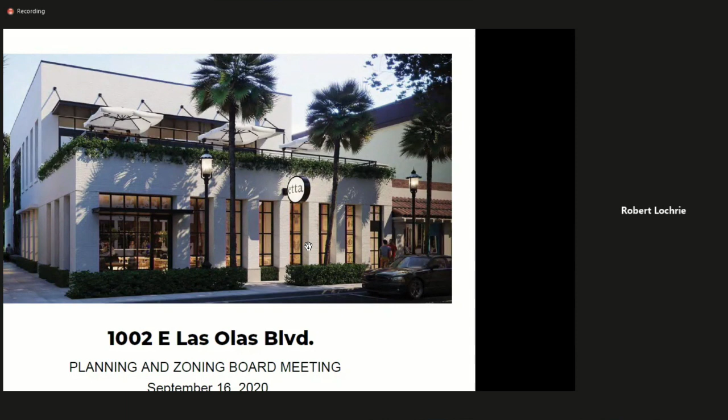One of the things about this site, similar to this entire corridor of Las Olas, is you have ample parking both to the south of the site as well as on the north side of Las Olas.

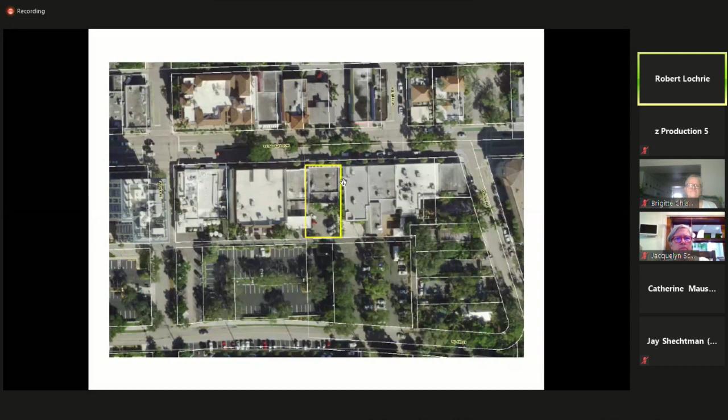This next view is a closer view of the specific parcel. It is known in part by, on the east end of the property, there is a breezeway that connects the city's parking facility - this is the nautical lot - just to the southeast of the site, to Las Olas Boulevard on the north. So this is the parcel we're talking about specifically.

This is the proposal for the new restaurant. It is a 2-story restaurant with ground floor restaurant, all interior to the building with seating. There is a second floor which includes a terrace with outdoor seating above. The second floor is stepped back significantly to provide for that terrace and to keep a uniform cornice height along Las Olas.

On the left side of the graphic, you see the breezeway I described. The windows that look into the restaurant continue not only along the storefront, but also along that breezeway. This breezeway is one of many along Las Olas that provides close access to the street and to the parking facilities behind. Mr. Ladd thought that was a very important component to keep with the restaurant.

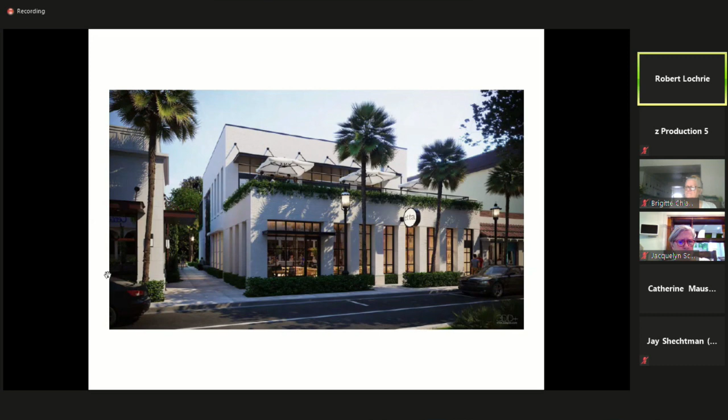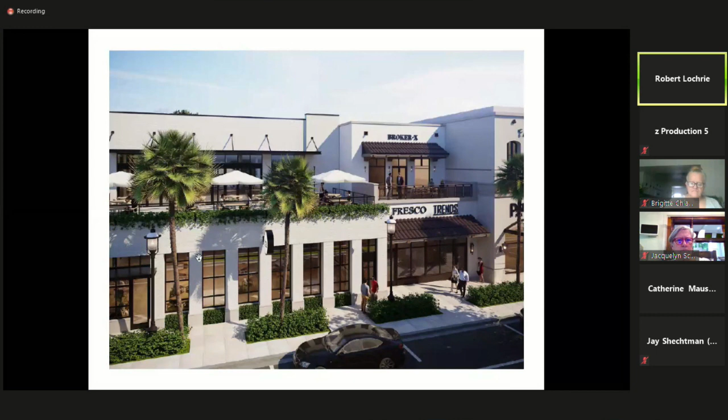This is a view of the restaurant from a little bit higher up, looking down at the terrace and also looking at a proposed project that our neighbor will be building just to the west of this site. So what you see on the left is the new restaurant, which is the Etta restaurant with the outdoor terrace above.

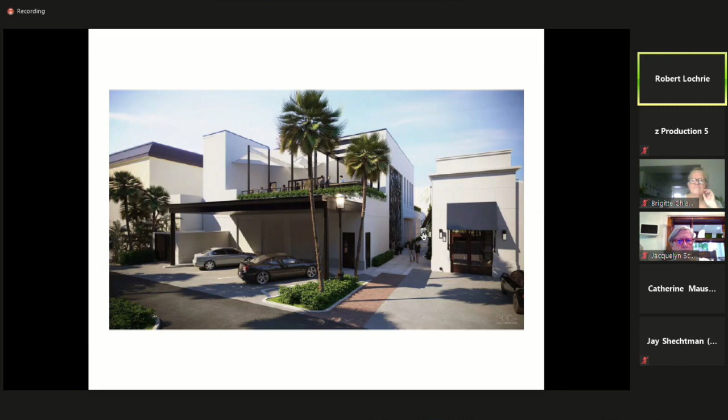This next view is on the south side of the restaurant where we've included 3 parking spaces. This is also where the loading and dumpster location is. It's right off the alley that serves all the uses along Las Olas. And again, you see the walkway which connects from the parking area to Las Olas in the front.

The restaurant being proposed is an Etta restaurant. It's a franchise out of Chicago. There's actually 2 locations in Chicago, and this is one of those locations, so it begins to give you an idea of what they contemplate to include within the restaurant itself.

Etta prides itself on a wood-fired hearth menu involving local ingredients to the greatest extent possible. It's very casual, yet it is a sit-down restaurant. A little bit more about Etta - this will be their first location in South Florida.

Similar to any project along Las Olas, one of the things that accompanies the site plan you are reviewing tonight is a request for a parking reduction. Obviously there is not space on this specific piece for parking, so we take advantage of a vast amount of public parking available in the general vicinity. The way your city code works, when we look at parking reductions, we look at the parking spaces that are within 700 feet of the specific restaurant.

In this case, our traffic consultant, Suzanne Danielson, did a study. First, she determined how many public spaces are available within 700 feet, and the total was 774 spaces. We then did an actual inventory of spaces available over the summer, but due to COVID, we decided to use a more conservative approach.

So we actually went back to historic data that the city has assembled on these parking areas through parking studies and analysis that were done in 2017 and used that as our base. Suzanne did take that base and apply growth factors, both seasonal factors, to increase the demand to provide a realistic expectation of what we would expect out there.

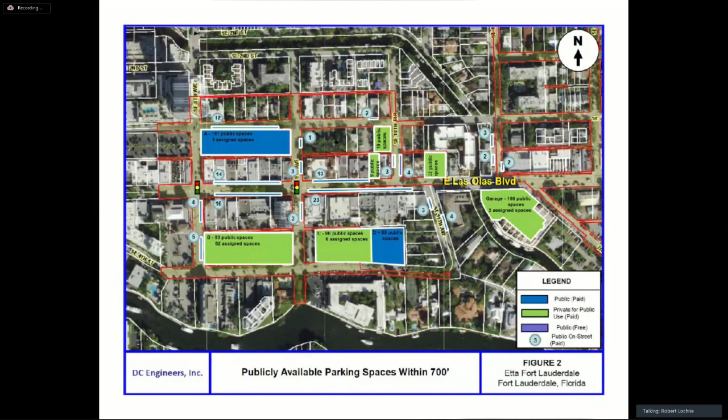Now, the reality is we only looked at parking spaces within 700 feet, which doesn't tell the whole story. When you really look at the Las Olas corridor, specifically relating to this neighborhood, from Federal Highway or the tunnel to the west, to the Tarpon River to the east, there's a vast amount of parking available. This is all public parking and does not consider any on-street parking. So when you look at the roughly 1,300 spaces available to the public, that doesn't even take into consideration parking along Las Olas or the side streets.

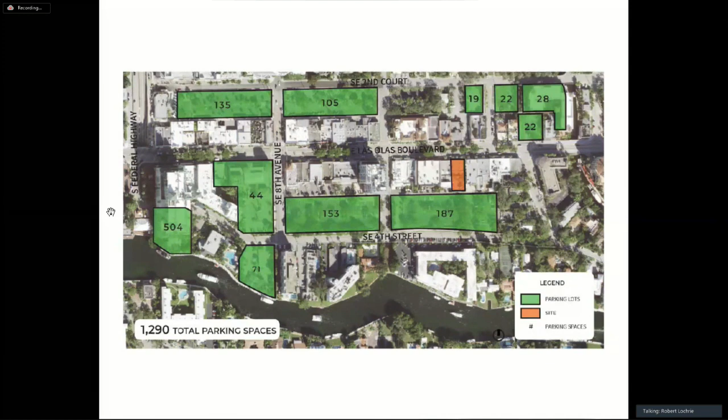We agree with the staff's recommendations. We note that they have done a thorough analysis of Suzanne's analysis and that ample parking is available to serve this use. We'd be happy to answer any questions you may have. Thank you.

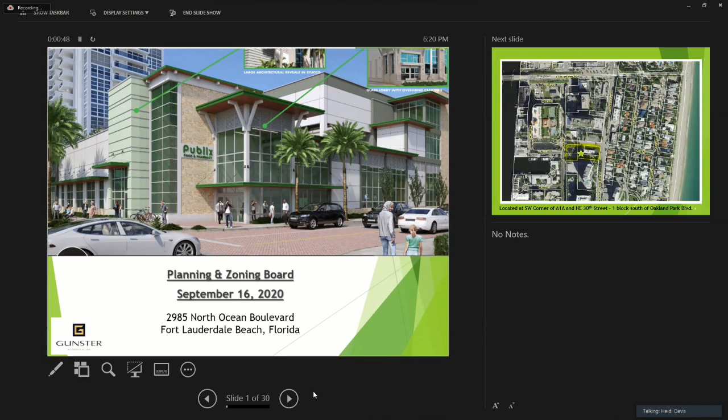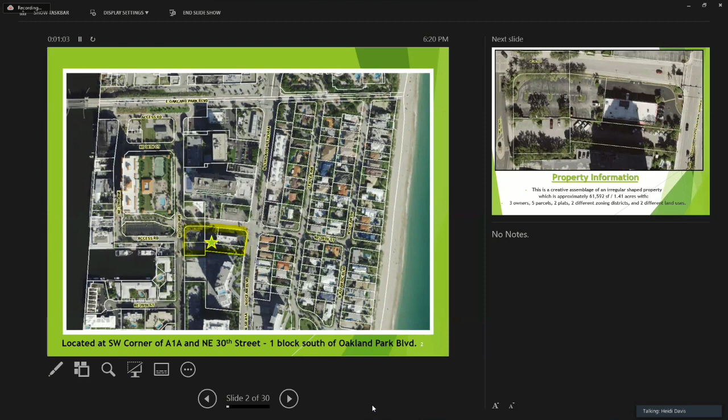The property is 1.4 acres, or approximately 61,592 square feet, and it stretches from A1A to Northeast 33rd Avenue and is surrounded by 3 rights of way.

Publix has been trying to locate a property on Fort Lauderdale Beach and the South Barrier Island for almost 10 years now. Through a creative assemblage that has 3 owners, 5 parcels, 2 plats, 2 different zoning districts, and 2 different land uses, they found this great property.

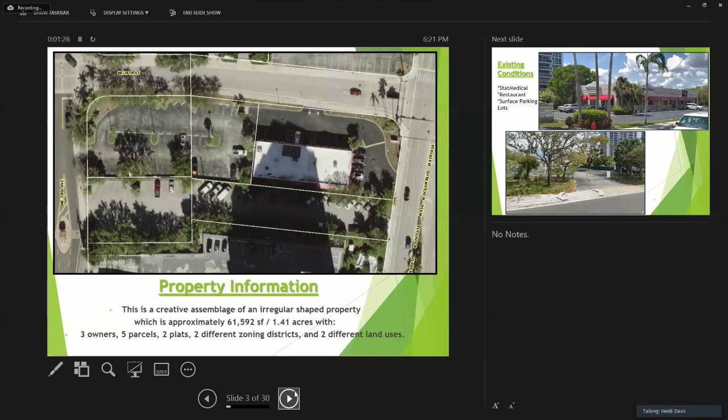The property is currently vacant commercial strip development where Stat Medical and the never-opened Baba Ganoush was located. If you can remember back, the property was also the original home of Shuck and Dive and Black Pearl. The remaining portions of the property are surface parking lots.

The proposed project will revitalize this area by bringing a much needed and desired Publix supermarket to the property. We have met with hundreds of neighbors and all the surrounding civic and homeowners associations, and there is overwhelming support for a new Publix at this location.

The proposed Publix is being designed with the neighborhood in mind. It is low profile, only 24 feet in height, and blends in with the surrounding natural elements of the barrier island. The design creates active uses and pedestrian-friendly streetscapes with large sidewalks and shade trees to encourage pedestrian activity along A1A, Northeast 30th Street, and Northeast 33rd Avenue.

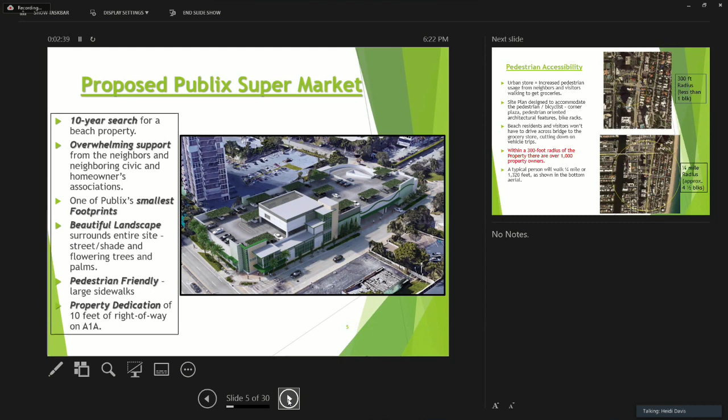It will be a store where people walk to pick up their fresh vegetables and fruits and daily groceries, similar to how Europeans shop, or to have a full shopping experience. The size of the proposed store is one of Publix's urban footprints, similar in size to the store across the street from Galleria Mall on Sunrise Boulevard.

The property is within walking distance of thousands of neighbors, which makes this location so good for the use. For our applications, we are required to send out notices to property owners within 300 feet of the property. We sent over 1,000 property notices to the properties within 300 feet, which is shown on the top aerial. Studies show that most people will walk up to a quarter of a mile for their shopping needs.

The bottom aerial depicts this quarter of a mile, which is approximately 4.5 blocks. If there are 1,000 property owners within 300 feet of the property, just think how many people are within 1,320 feet of the property. A lot of these people head over the Oakland Park Bridge now to do their grocery shopping. The new Publix will cut down on those traffic trips. And of course, Publix always has Instacart delivery service.

There are 3 applications before you this evening. The first is the site plan for the grocery store. The second is the rezoning to change the rear 2 lots from RMH 60 to community business, and a request for 0.52 acre of commercial flex to be allocated to the property. A 4th application for minor setback variances was unanimously approved 7-0 at the Board of Adjustment last week.

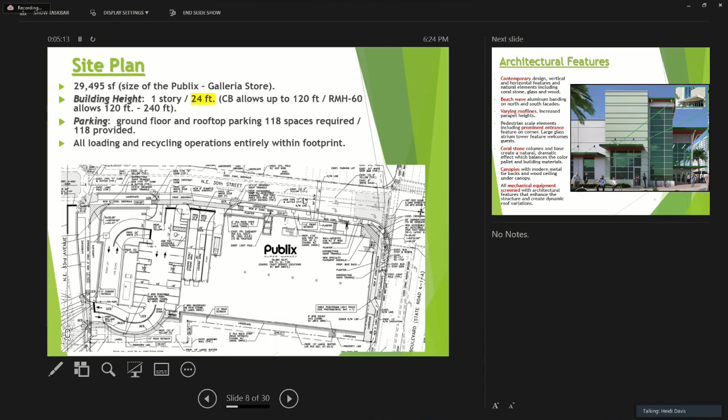There is parking on the first floor of the garage, but the majority of the parking is located on the roof of the structure. The height of the structure is 24 feet, which is within the permitted limits of up to 120 feet within the CB zoning district, and 120 to 240 feet within the RMH 60 zoning district. All loading, recycling, and service operations are conducted entirely within the footprint of the structure.

The project's design is characterized as contemporary style architecture, exemplified by the simple and clean lines of the structure, natural materials and elements, including coral stone and glass. The street level facades enhance the pedestrian environment by incorporating architectural features into its design, which add special interest and compatibility with nearby properties and site elements.

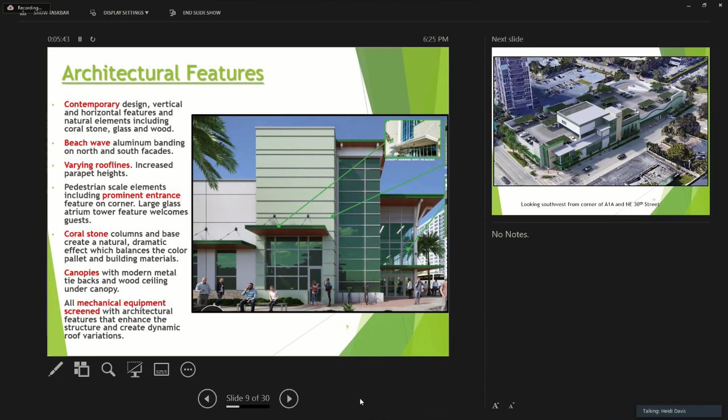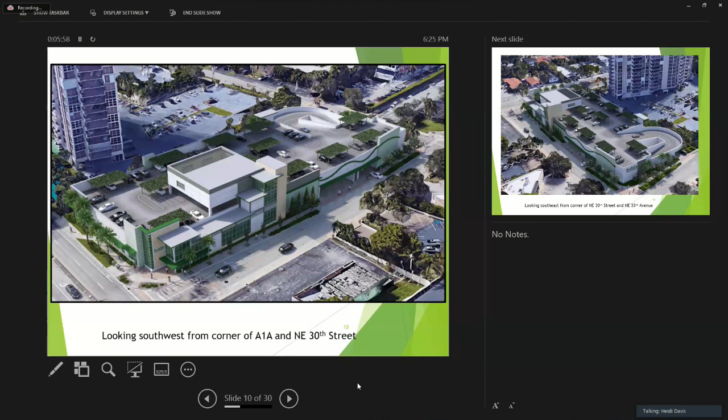Modern curved and geometric features are also incorporated along the facades to resemble ocean waves. The facades of the building are well articulated, providing visual variety and interest without being overwhelming. The architectural features continue around the entire building with varying levels of architectural dimensions and features which break up the mass of the facades.

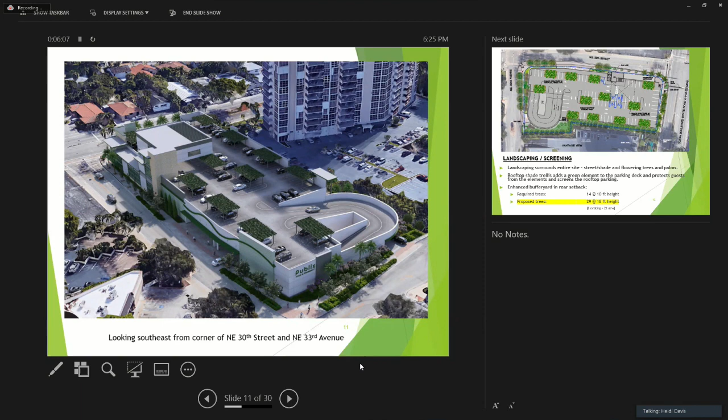The project is enhanced by landscaping, including shade and flowering trees and palms that surround the entire property, including a heavily planted buffer yard on the south side between properties. Although the landscape code only requires the buffer yard to contain 14 trees at a planting height of 10 feet, Publix is proposing to include 29 trees within the buffer yard at a planting height of 18 feet. Shrubs, bushes, and ground cover will also be planted within the buffer yard to add additional layers of landscaping to enhance and screen the building.

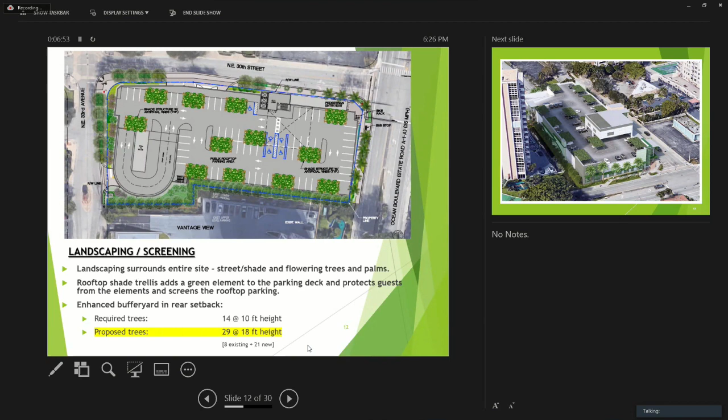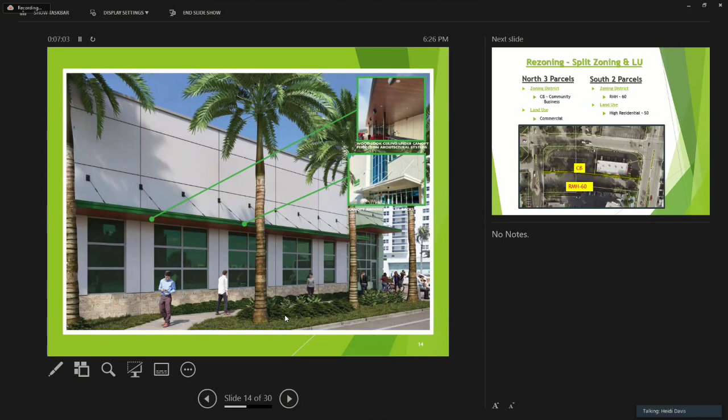Rooftop trellises add a green element to protect guests from weather and to screen the rooftop parking. Here's another rendering looking northwest, showing the A1A corridor, and here's a close-up perspective of the project along A1A.

As part of our applications, we are requesting a rezoning and for commercial flex allocation. The property has split land use and zoning designations, with the northern 3 parcels being zoned community business with an underlying land use of commercial, and the south 2 parcels having a zoning district of RMH 60, which is the city's most intense density, with an underlying land use of high residential 50. We are requesting that the southern parcels be rezoned to CB, or community business, to be consistent with the northern parcels.

The property is only 1.41 acres, and the applications are being reviewed as a site plan level 4. The use is consistent and suitable with the surrounding area, and there will be no adverse impacts to the character of the area.

Thank you, Heidi. Is it the desire of the board to include the staff report with the official record of the evening? All in favor, aye. Aye. Any opposed? All right, with unanimous support, we'll include the staff report as part of the record.

I have a question for Ella. Are we making one vote on a rezoning which includes a commercial flex allocation?

In other words, we do not have a second vote required? That's correct, Chair. This is actually a site plan level 4. The rezoning is tied to flex allocation, so it's a recommendation to the commission.

Okay, thank you. I am looking at my screen and I do not see any hands raised, so I'm going to open the public hearing. Do we have any members of the public wishing to speak on item number 3, PLN SITE?

19110004? Any members of the public? Chair, we have 4 members of the public who signed up to speak on this item. The first one is William Brown, listed on the list, and he has 5 minutes to speak as the representative of the Central Beach Alliance.

Are you timing him or should I? I can time him. Okay, great. Mr. Brown. Mr. Brown? Hello, Mr. Brown. Mr. Brown, please unmute. Can you hear me now? Yes, thank you.

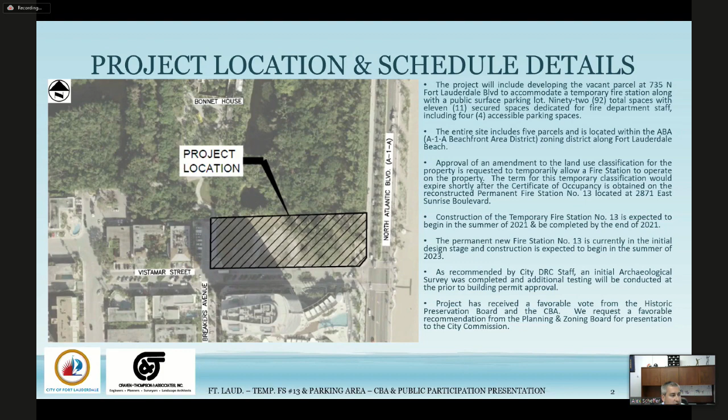Does that complete your presentation? Got a couple more slides really quick, I'm going to try to go through. So these are the existing site conditions. It's just a vacant site right now. There's Breakers Ave on the left into the Bonnet House property, and then the view across Breakers to the east.

Here's a picture of the proposed site plan. Egress through the center of the site. We have new sidewalk going along the perimeter of the site, along with tree installation, and new stormwater infrastructure along Breakers. And there's an existing traffic preemption device to allow left turns at A1A.

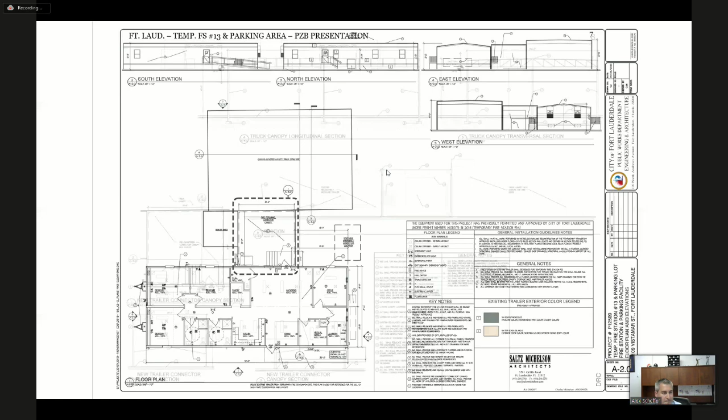And then a couple more blow-ups of the site plan. Here's the elevations. And then the landscape plan. And then the last thing I want to talk about is one thing that came out of the meeting, the public participation meeting, was the conflicts that we have with some existing parking along Vistamar.

So as part of this project under separate permit, we're going to have 3 spots removed on the west side of Vistamar and 2 spots on the east side to allow for clear sight. And that is our presentation if you have any questions.

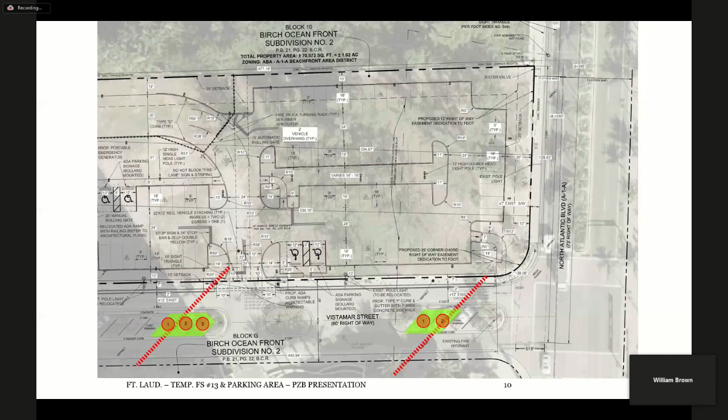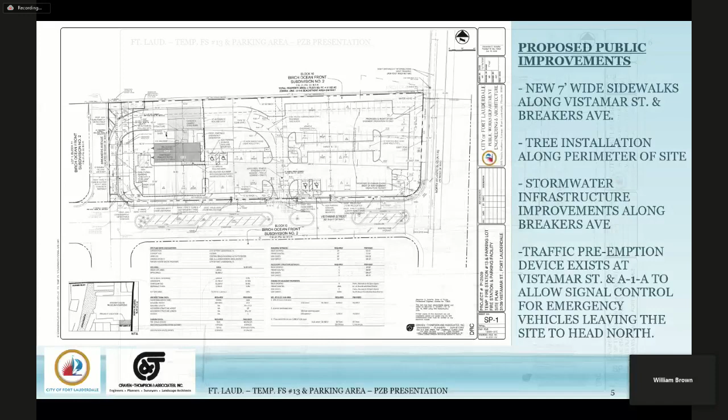of our membership for this proposed temporary fire station at this location. One of the major concerns that came out of this meeting was the traffic issues that could result, not only from the public parking lot, but the entry and exiting of emergency vehicles on Vistamar. I know that the site plan you're looking at and voting on tonight is not part of this traffic issue, but however, we've had a commitment working with the district commissioner, vice mayor, Glassman's office and Transportation and Mobility to work with some type of resolution on possibly removing some of the medians

down Vistamar, along with some of the additional parking spaces. And that is a work in progress, that is acceptable to the Central Beach Alliance and to the immediate neighbors and condo associations as we continue to work forward on this project. And staff also participated in our presentation along with fire rescue personnel, and it was a great project to garner the support of the community. So with that, I would ask that this commission approve the recommendation and forward it to the City Commission.

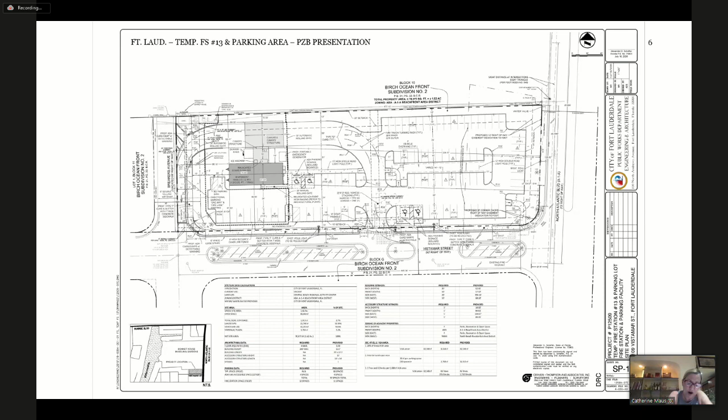That takes us to item number 5, PLN ULDR 2007-0001. This is not quasi-judicial, so I am not going to ask for disclosures. Is it Karlanne who's presenting?

Madam Chair, yes, that'll be me presenting. Okay, hang on, Karlanne. Michael? Yeah, Madam Chair, I need to recuse myself. I filed a form with the clerk for this item and the next two because these items affect my family's properties. Well, I hope you're going to stick with us and not go out to a better dinner. I believe I will. I'm gonna stick right there with you.

Okay, Mr. Weymouth, this is the airport zoning. I think you're speaking to items 6, 7, and 8, if I'm correct. I'm sorry, you are correct. I retract my recusal and we'll table it for one more item. Okay, terrific. Item number 5, Karlanne, you're up.

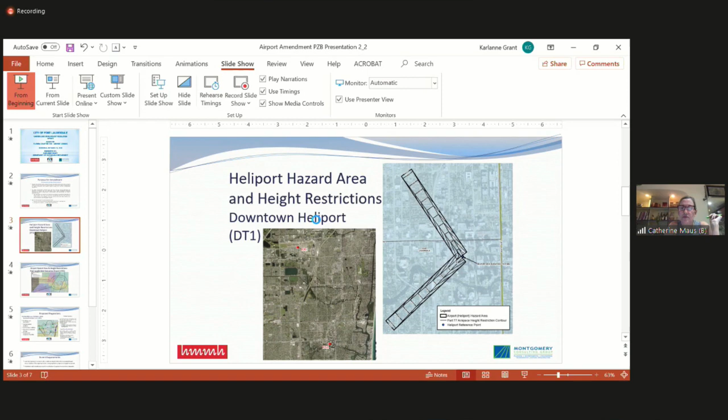Good evening, Chair, members of the board. Karlanne Grant with Urban Design and Planning. Sorry, I don't know why it's doing that.

Let's pause it. I'm here to present on - I am sorry, it keeps going. Give me one second, let me just figure this out. I'm gonna have to, it appears it's gonna keep going, so I'll switch back and forth. I'm just gonna do it this way, I'm sorry, it's just gonna be easier.

Good evening, I'm here to present on the ordinance to amend Section 47-14 of the code, to provide the requirements to have the Chapter 333 requirements in our ULDR, Unified Land Development Regulations. Chapter 333 requires that all governments that have an airport hazard area, which are any areas that an airport hazard or obstruction might be established, are required to adopt, administer, and enforce airport zoning and land use compatibility regulations. The state requirements mandate that the land use and zoning regulations be amended to address land use restrictions, noise, height limitations, locational requirements, permit requirements, administration, and enforcement for airport protection.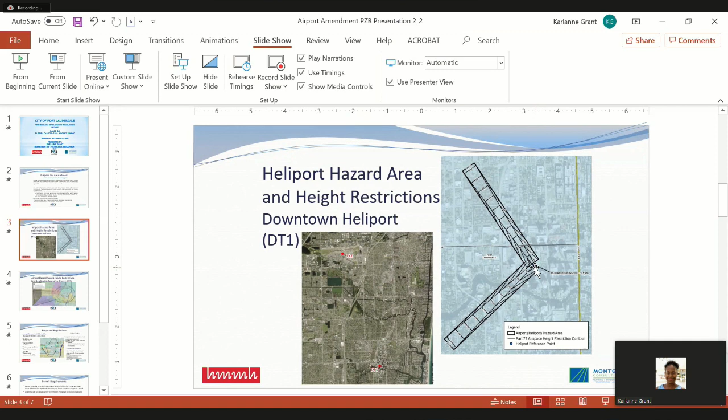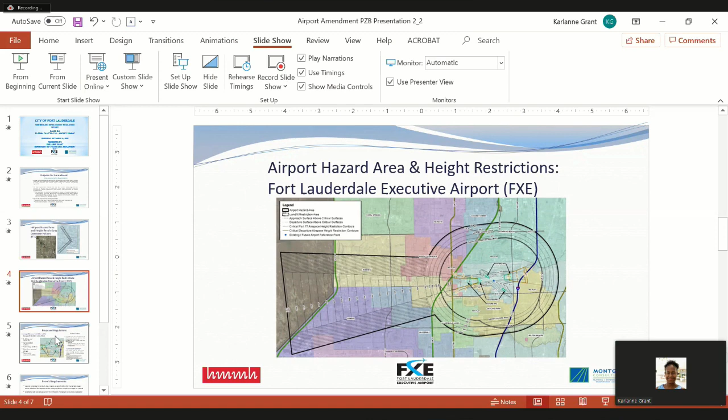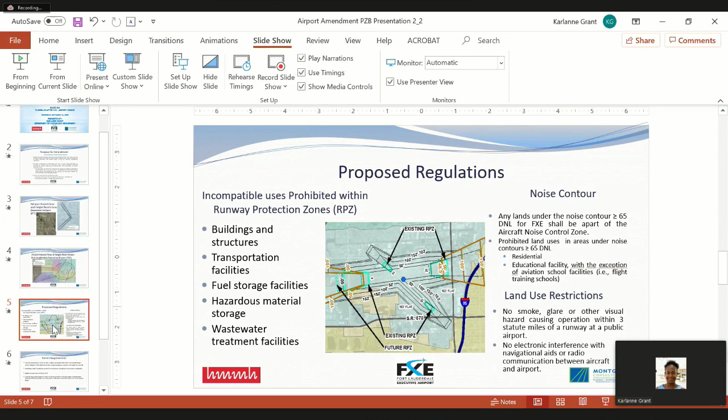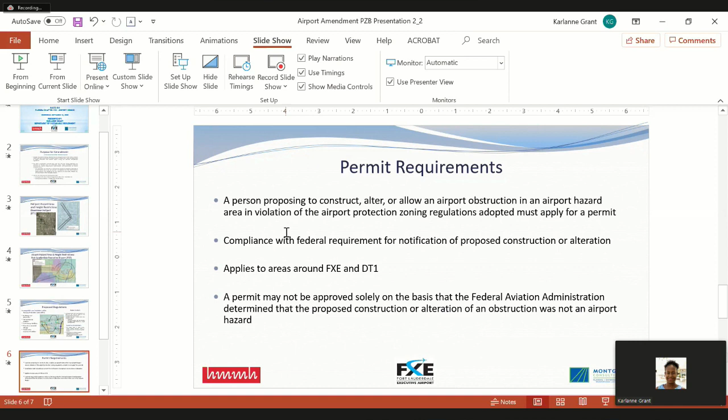Some of the requirements for the permit would be that anyone proposing to construct, alter, or allow an airport obstruction within the airport hazard area that would be in violation of the airport protection zoning regulations must apply for a permit. They have to comply with federal requirements for notification, and this would only apply to the FXE and DT1, so the heliport and the area in and around the executive airport. It is important to note that a permit may not be approved solely on the basis of the FAA's determination that the construction or alteration of an obstruction was not an airport hazard.

And with that, if you have any questions, I'm here. We also have folks from the executive airport, such as the airport manager, Rufus James. We also have Carlton Harrison, Jerry Pryor, Florence Straw, and our consultants from the Montgomery Consulting Group - Monty Geddes, Pratik Sharma, and from HMMH, Bob Metzer, to be able to answer any questions.

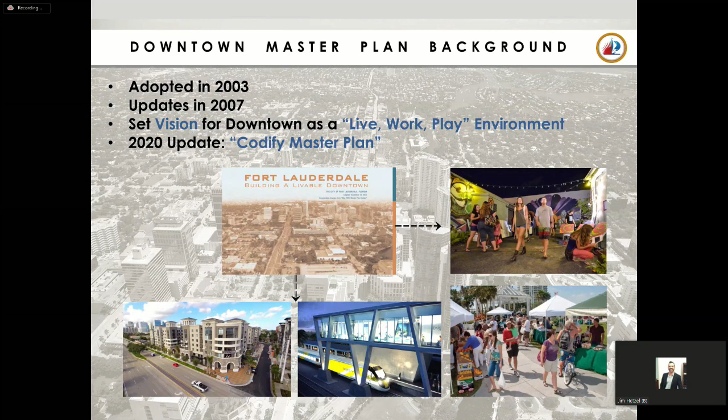So tonight I'm going to give an overview on the codification for the downtown master plan, and as I mentioned, identify some of the differences that have occurred since the last time we were before you. As you know, the downtown master plan was adopted in 2003 with updates that occurred in 2007, and it set a vision for downtown for a live, work, play environment. In 2018, we were directed by the City Commission to look at codifying the master plan, and we are now here before you with 2020 updates that I will run through right now.

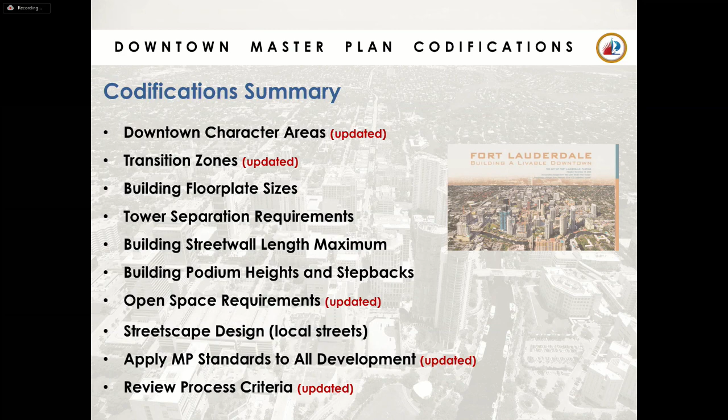So some of the highlights from public comments that we received, this is just in general, it doesn't get into every specific one, but some of the general comments we received were about the character area boundaries and looking at those boundaries and the patterns of development that has occurred over the years, and whether those boundary changes should occur or not. So we're going to walk through what's being proposed.

In general, some of the other comments we got from the public were about building height, tower separation, transition zones. There was also something put forth about providing flexibility to an applicant about site-specific standards, for instance, on a case-by-case basis. There was also some concerns from public comments about the applicability of the downtown master plan on non-residential development, and you might hear a little bit about that as well tonight.

However, we do want to point out that something has to apply to development, whether it's the existing zoning that is in place for downtown, or the master plan moving forward. As we're moving forward, we're proposing that all uses are subject to the downtown master plan, both residential and non-residential. So we just want to highlight that.

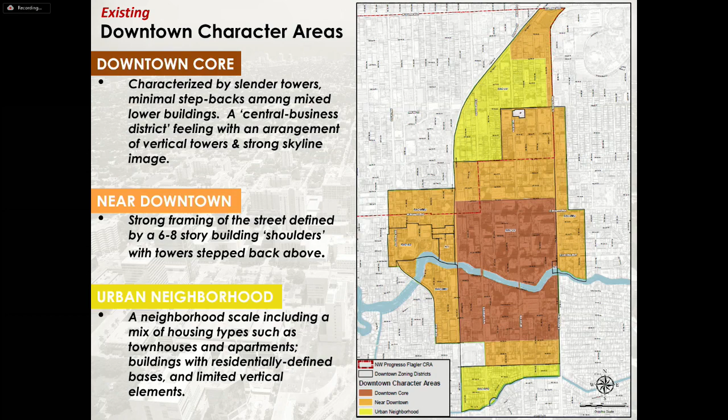As I mentioned in the updated slide, there are some changes being proposed to the character area boundaries. The downtown core would be expanded to Northwest 4th Street to the north, and it also goes westward along Broward Boulevard. The near downtown kind of gets modified as well, where it is proposed to expand northward to 6th Street, and also a little sliver along Federal Highway north of 6th Street would expand or be wider.

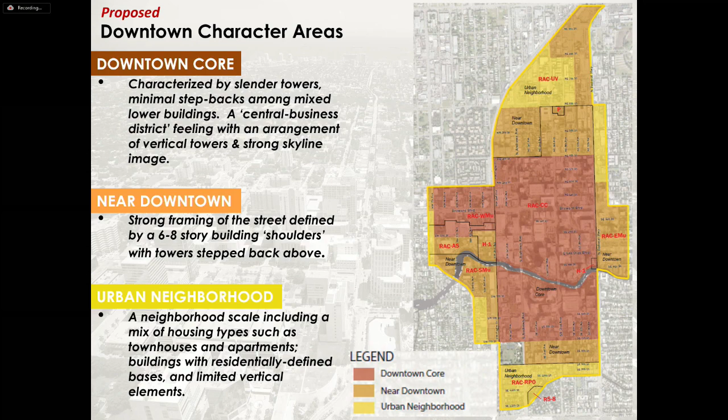I have the next slide showing a side-by-side comparison, so I'll get there. Also, the urban neighborhood character area would change in areas adjacent to Rio Vista, Victoria Park, and Tarpon Bend. I'm going to go to the next slide because I think it's better to show a side-by-side comparison of the existing character area boundaries and the proposed ones. I'll leave the slide up for a minute and highlight, if you see my cursor, where these changes are occurring.

Jim, just a quick correction. You said Rio Vista, and I think you meant Victoria Park, Tarpon River, and Sailboat Bend on the urban neighborhood character boundaries. Oh, thank you. Yeah, did I say it wrong?

So I'm going to walk through some of these changes again so it's clear. If you see my cursor up here, the northern part of downtown on Federal Highway existing had a sliver that was near downtown, which, from a developable perspective, those blocks aren't very deep. So there's a proposal to widen that, changing it from urban neighborhood to near downtown. You'll see this area here, the Fat Village area, would go from urban neighborhood to near downtown.

Then you have the sliver here along Federal Highway next to Victoria Park, that would go from near downtown to urban neighborhood. As I was mentioning, the downtown core would expand northward to 4th, and also west along Broward Boulevard. Then, against Sailboat Bend and Tarpon down here in these two areas, there's a change from near downtown to urban neighborhood.

So I just want to make sure there's a side-by-side comparison so you can see that.

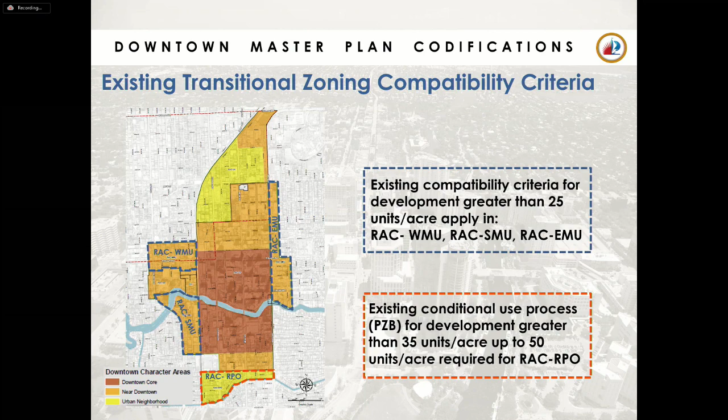I always find this slide interesting because this is our existing zoning. It's very cumbersome to apply, very cumbersome to implement, and it's difficult to establish a pattern of consistency versus the downtown master plan. As you can see, the screen shows how cumbersome it is just from the content on the screen.

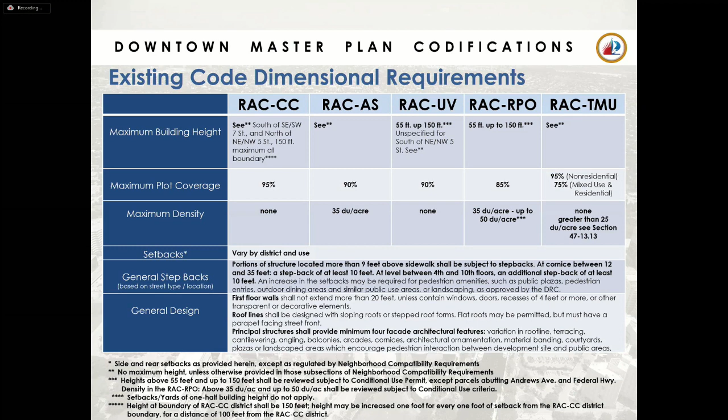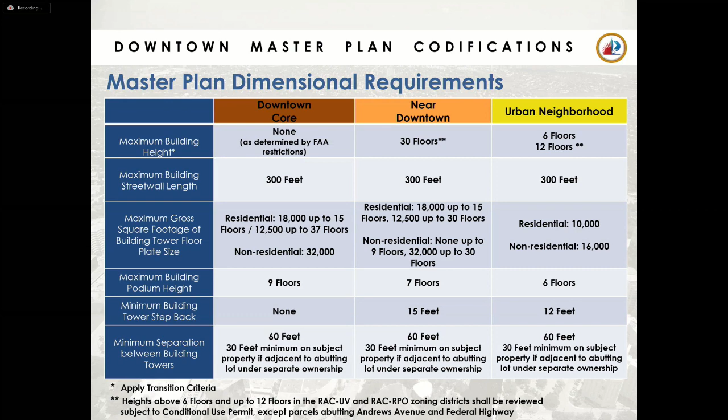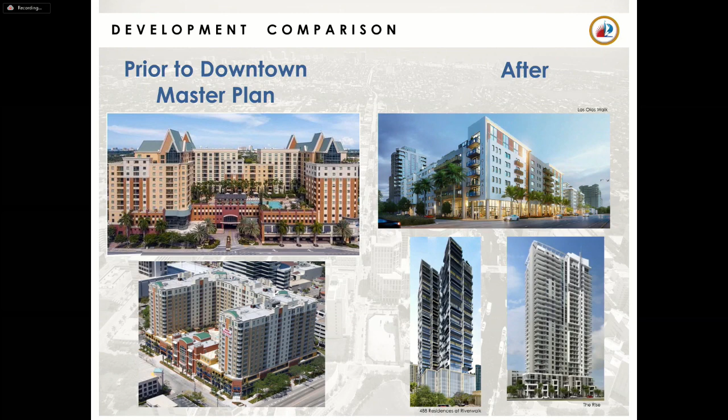Here's another example with images of before and after. The picture on the left is New River Landing, which is interesting because it's located on the river, which is even more important because you have public access to the river—it's a public amenity. Yet buildings that are large and expansive like this limit the light, the air, and the feel of the experience for the public along the river.

Another aspect is that the downtown master plan does not restrict quality design. There's a bit more of a struggle for staff because you deal with quantitative elements, like tower separation and development standards you design to, versus qualitative elements which are more difficult because they're subjective—beauty's in the eye of the beholder. But the downtown master plan does not restrict creativity, good quality, or high quality building materials. This tends to be a struggle for us because it's so qualitative and subjective, but we push our staff hard to get the best designs through the development review process. A lot of what you see built in the downtown area reflects efforts from city staff to get the best—I just want to highlight that we work hard for that.

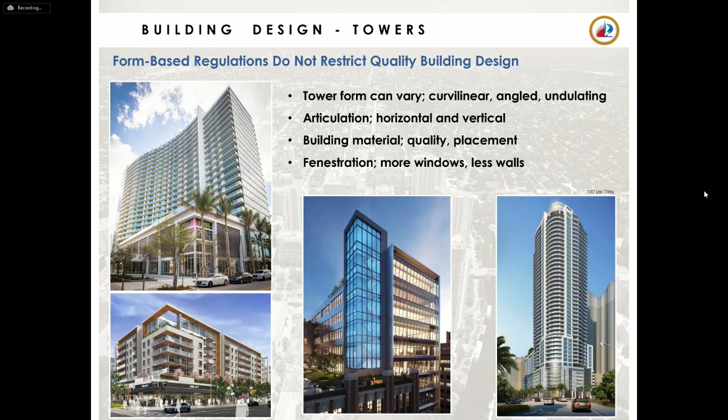This is another example of building materials and variation in design. What's interesting is that Whole Foods, I think, is in Denver, and at the corner they have a second level that's an outdoor eating or dining area for when you get food to go. Building corner design is important for the experience along the public realm. Again, the downtown master plan does not restrict creativity—I'm just trying to achieve these things.

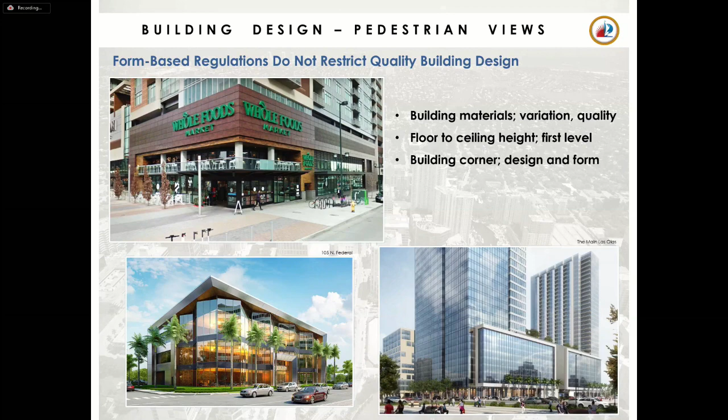So I'm going to walk through the different codification items. These slides might look familiar, but floor plate size is one of them. Looking back at the character area as a framework for how you achieve certain building designs and forms, you can see the downtown core and near downtown urban neighborhood floor plate sizes are limited based on use—office environment versus residential. The difference is based on character, going from the more dense urban core to the less dense urban neighborhood. These numbers are in the downtown master plan today; we're not proposing to change any of them, just proposing to codify what's in the plan today.

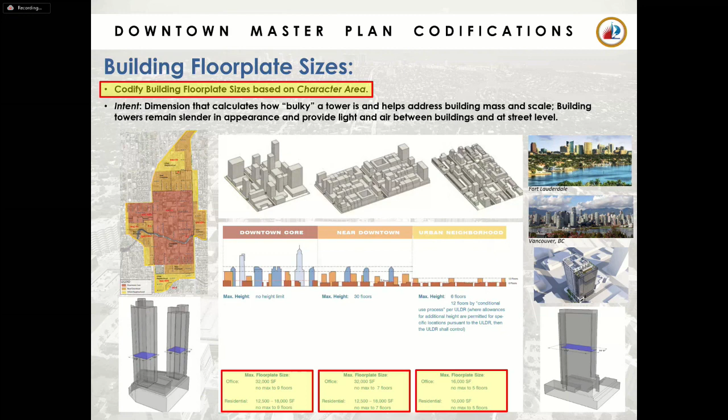Building street wall length. This is the experience for the pedestrian and public realm as you walk along the street. Again, we're not proposing to change the number. The downtown master plan talks about 300 feet maximum length of a street wall, and also the requirements for building articulation and certain treatments and breaks in building design. You can see the image on the bottom left has a breezeway through the building on the first level to create a certain experience, breaking it up as you're walking by and experiencing that street wall.

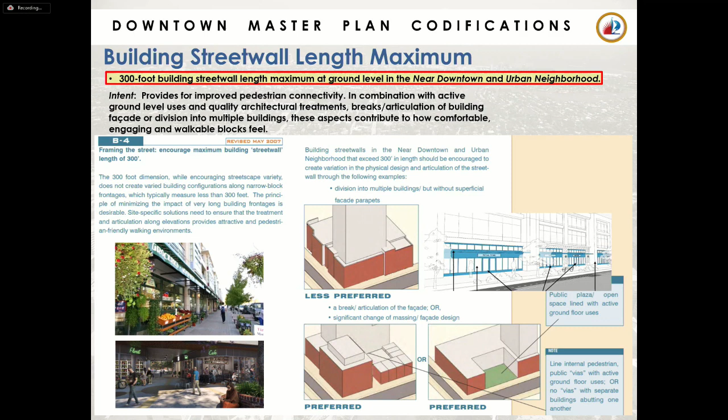Maximum building podium heights. Again, based on the character areas, these vary, with the core not having a maximum building podium height because the towers could go straight up. It's more for your near downtown and urban neighborhood. We can't put parking underground in Florida, or if you try to, that's very expensive. What we tend to deal with are parking podiums, so the building podium tends to be a parking podium. What we try to do is get those parking podiums screened and lined and make sure they are not exceeding the height established in the downtown master plan.

This particular item ties to the qualitative side of things in the downtown master plan: if you're providing a parking podium, the qualitative side of it is how do you screen it, because lining it with an active use gets challenging unless you have a bigger property. We then look at the qualitative elements of how best to screen that parking podium with the highest quality material, making sure that you can't see the parking podium.

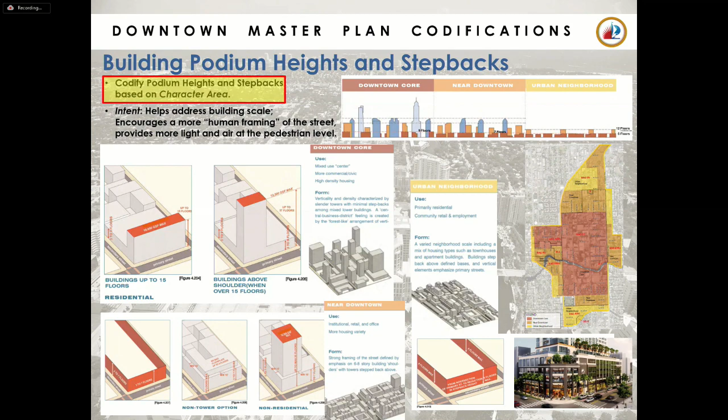As I mentioned in a previous slide, we are looking to explore this in more detail, to do an additional analysis to see if this is the best approach to get what we need as far as downtown open space. However, we do recognize, and staff is asking for a little further direction, the importance of open space in an urban core and how to achieve it and what is the best formula or approach to get there. So this may change, but right now we're going forward with this and asking for further direction.

Another part of the codification is adopting streetscape design. The challenge here is we do not have jurisdictional control of all the streets. We have FDOT and Broward County to deal with, but what we're promoting is coordination with those agencies to make sure that the street cross sections reflect what's in the downtown master plan. However, what we do have control over are the local city streets, and we're going to be codifying this particular cross section to deal with local streets.

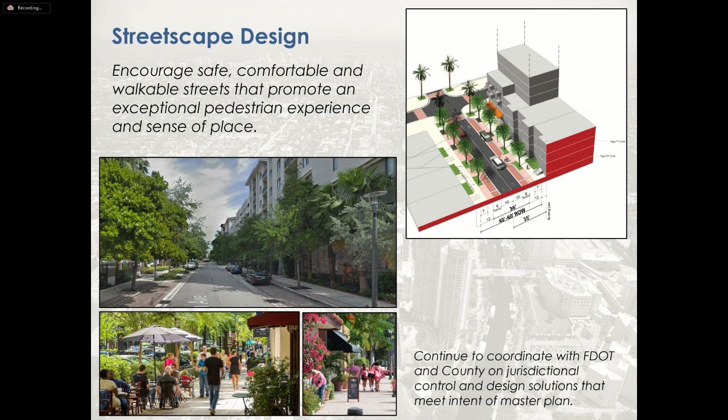And you can see the image, the first picture on the left, and once you start to implement it on local streets, what the result of that is. It tends to achieve exactly what the intent and goal is in the downtown master plan and these cross sections that we utilize all the time.

Another aspect we're trying to address is the conflict with utilities. Sometimes what's happening with some projects, as staff has experienced, is that there's a conflict because utilities are either underground or above ground. Then all of a sudden the street trees get compromised, where you need to accommodate the street trees and all these utilities. So some things need to move around - the building might have to get shifted back, but the intent for the cross section should always be maintained.

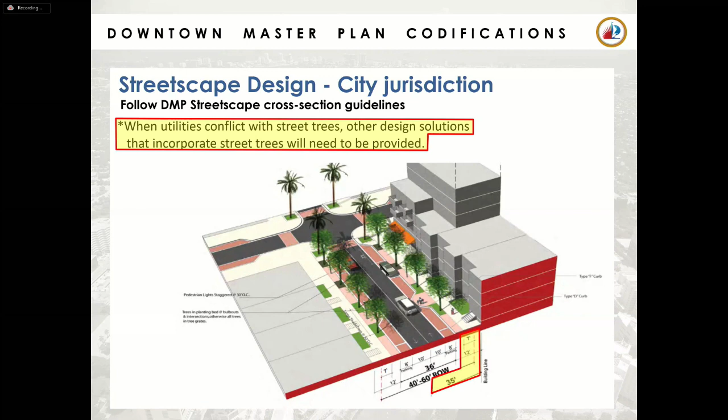So the review and approval process, I think you're all very familiar with. For the most part, all the development applications in the downtown are a site plan level 2, which goes through DRC. Once DRC has done its technical review, it's then sent up to the City Commission for a call-up.

There are some situations where a level 3 is required in the downtown, either for building height or some other reason. For instance, in the urban neighborhood, you can go from 6 stories to 12 stories as a conditional use, which is a site plan level 3. So there are some nuances where some projects have to go through a level 3 application review and approval.

For a commission to call an item up, they currently need to identify, based on criteria, that staff has misapplied something in the process. What staff is proposing is that criteria be modified and that requirement removed, so the commission can call an item up regardless - they can call it up if they just want to look at the project. There's no criteria in the sense of saying staff did something wrong or misapplied something. So that criteria is being proposed to be changed.

There's also going to be a process for an applicant to ask for relief. So for instance, if they have a site-specific standard that does not meet the downtown master plan but still achieves the intent, they can go forward with a request to the City Commission. That would be an actual City Commission action item, an agenda item, if they wish to go down that road.

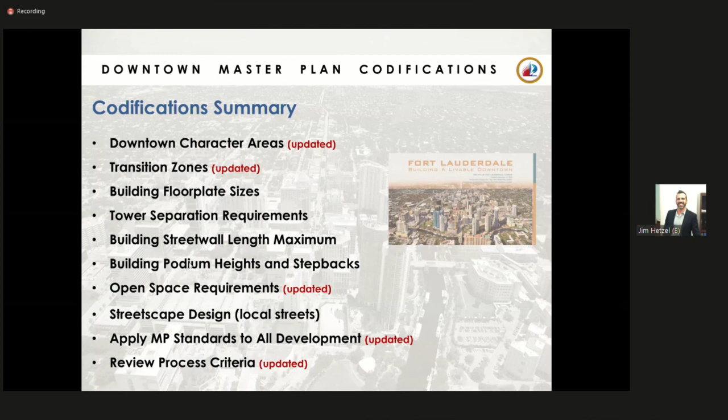Sure. What I'll do is pull back up that slide that has the public outreach. So as you can see, October 16th, 2019 is when we came to you last. Since then, there have been several meetings with different associations and also with the Fort Lauderdale Forum, the chamber as well, where there's been additional outreach since we saw you last.

If you just look up on the— I do, I see, yeah. You see the DDA and the chamber, there was a joint one at that time. And let me go to this slide—so you could see what those specific items were that you were trying to recall, Mary. I wrote them down, probably not as well as you phrased them, but when it's appropriate, Catherine, I'd just like to move each of those so we can see what the will of the board is.

I apologize for interrupting, Mary, but Jim, was the chamber's position the same in 2019 as it was last week or whatever that was? That is correct, Chair.

I do want to mention a little bit about that. Currently, if a non-residential development came in and the downtown master plan didn't apply, they'd be subject to the zoning requirements in the code. We've experienced, and I'll give you two examples, the Del Mar Hotel and the Main, which is an office complex on Las Olas Boulevard. Both of those projects, when they went to analyze existing zoning requirements versus the downtown master plan, came to us voluntarily wanting to follow the downtown master plan. To me that says what we're proposing is actually better for them, not worse. It worked better for those two projects, which are pretty recent examples of non-residential development. I just wanted to call that out.

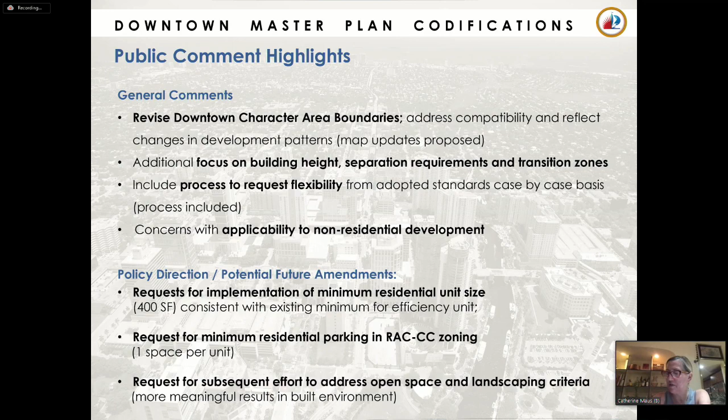On the tower separation, can we discuss tower separation? You're recommending 60. It was, I read back in your comments, it is 100. It's been generally 100, it's going to 60 and then 30. What's your question for Jim? Well, I'd like Jim to explain just exactly how much we're reducing the tower requirement right now.

This is Jim. Just for clarification, we are not proposing anything different than what's in the downtown master plan. The slide you see before you is what's in the downtown master plan: a minimum 60-foot distance between towers. There's never been 100 identified in the downtown master plan.

I got that from a comment that came out of the Downtown Civic Association meeting. I'm trying to find those minutes. Yeah, that was a public comment, a recommendation from the Downtown Civic Association that there should be a minimum of 100, but there's no analysis behind that.

What we have before us is a downtown master plan that had a professional consultant come up with these recommendations based on analysis. So if we were to go back and change these numbers, we would have to basically redo a full analysis of the impact and where you get that from.

So when would you have a tower separation of 30 feet, Jim? You would have it on an individual parcel. For instance, if I'm developing a parcel and building a tower on it, I need to maintain 30 feet from the tower to the property line. If the adjacent parcel develops and puts a tower, they would do the same, then there would be a 60-foot separation between the towers.

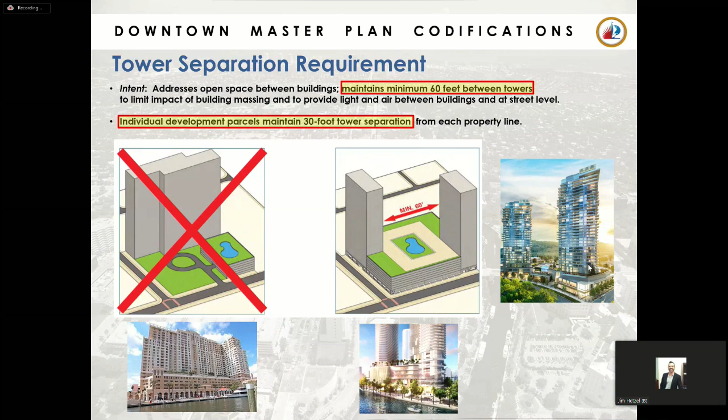Okay, so 10%. I'll probably ask Ella to jump in and help me here as we go through some of these specifics. I do want to clear up what Jim just answered about the tower separation. The way the code language is written, exactly how Jim explained, if you have a separation and an adjacent lot, you're only responsible for the 30-foot portion. So you would not have to go to city commission if you have an existing site that you're redeveloping and the adjacent project is a little bit closer.

Okay, so Ella, if you go down to the change you're making for open space, what does that come out to? Now you're saying 10% of the lot, previously you had specific numbers. How does that change the outcome? Well, no, that's actually a clarification there. Where you see 'new,' there's actually no requirement today. There's no requirement in the city center.

Okay, right, how is it, what's the net, if all I'm trying to get is to the net impact of what you're doing here. You have a minimum of 10%. How would this differ from someplace else?

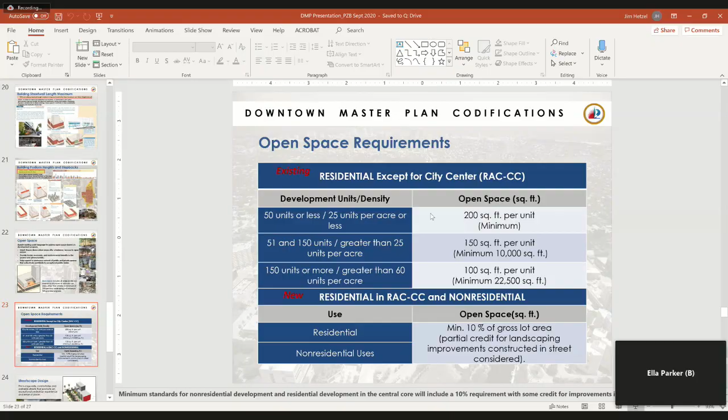But with this type of an effort and the request to make these codifications in a fairly quick amount of time, we would need to do a lot more analysis, possibly hire a consultant. So we recognize we'd like to revisit some of this as a future amendment. But for now, what we did do an analysis on, and we did work with some existing applications, is look at that 10% minimum where nothing exists today. We have the same intent to encourage a great sense of place and usable open space for our residents downtown.

But it wasn't part of this effort because of that additional analysis we would need to pursue, other than that 10% addition. And on the transition areas where you changed the boundaries of some of the areas—or Catherine, do you want me to wait till you get to 7 and 8?

No, go ahead, Mary. I'm just wondering what notification you gave to property owners.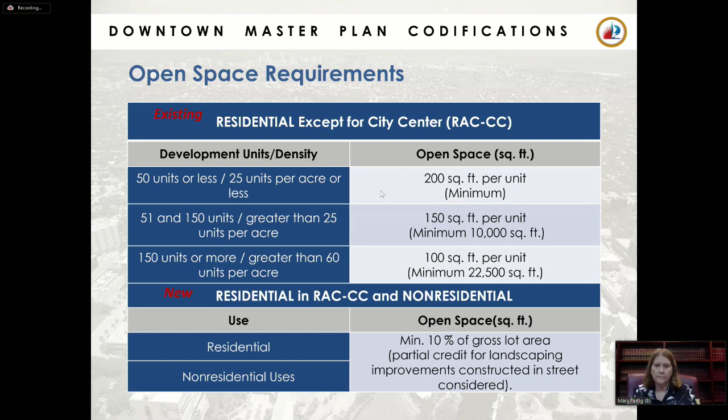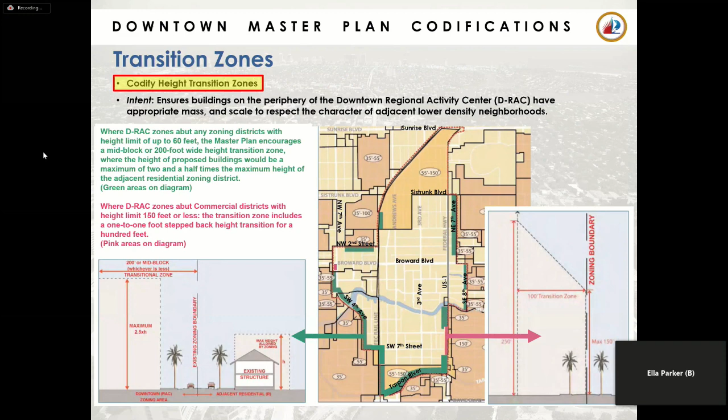Yeah, so the code-required notification was done, which was the newspaper notice, that's been included. But we also voluntarily went ahead—and you saw the amount of meetings we've had that have led us to the point we're at today, with a lot of outreach and publicly accessible meetings. We also posted signs around major intersections. Again, that was voluntary, just to make sure property owners were aware, and those were posted, Jim, I believe about 2 weeks prior to this meeting, if you could chime in.

Yep, we posted at various locations throughout downtown, I believe about 11 signs at intersections and a couple more in the medians on Federal Highway. And it was done 15 days ahead. It was done 15 days prior. All right, I'm sorry, I thought I heard you say 10. Okay.

Okay, Catherine, I'm going to pass this on to someone else for now. Okay, Mary, thank you. I do believe, I thought I saw another hand, but I don't see it now. Wait, Coleman.

Thanks, Catherine. I just wanted to talk about the 400 square foot requirement. I understand, I guess, where that comes from, and I know that recently in the city there was a project in the core that probably fell below that. I'm not necessarily saying we shouldn't adopt that, but one thing we have to keep in mind is we talk about affordable housing being a problem in the city, and every time we adopt a regulation like that, we make it harder and harder to attain. At some point we're going to have to really get serious about that, and some of these requirements, especially this one, I think make it really hard to build affordable housing. I'm not sure where we go from here if we adopt something like that.

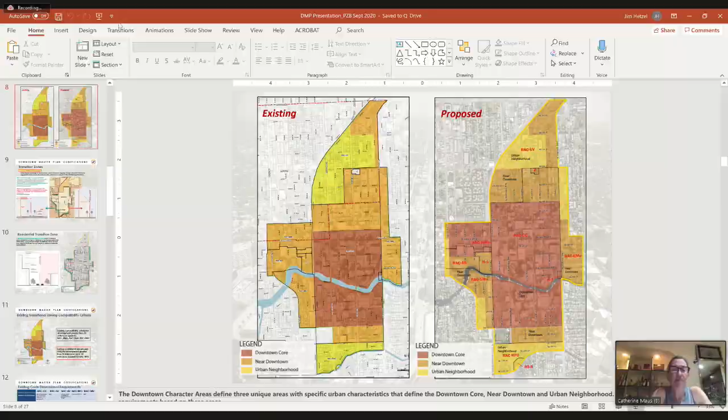Chair, the transition zones criteria is actually under the transition zones item, which is item number 8. Okay, so just save that, Catherine. I'll save it. I'm looking on 7. 7 has the charts, but...

Oh, I see, Jim. Okay. All right, so Mary, you're moving item number 7 for approval? Yes, this is the character areas, and this is the map. Jim, I'm moving it for approval, but I'm going to have a question if I get a second.

Just to clarify that the map is not this particular item. Pardon me? Dwayne, yes, what did you say? I believe that the map would be the next item, number 8. Is that correct? It's attached to number 7. Character areas are number 7 and the transition map is number 8.

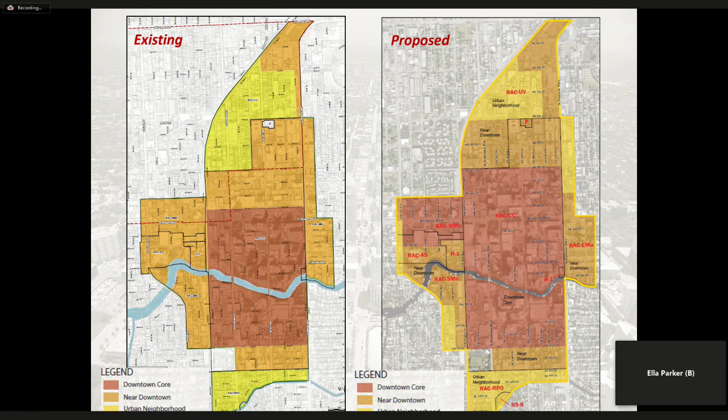A lot of the amendments, though, are all encompassed under item 6. So with the exception of the proposed change to the transition, perhaps those requests could be made under item number 6. So to clarify, item number 7 is a textual change, whereas item number 8 amends the map. Okay, so we did include Mary's 4 amendments in item number 6.

So Mary, I guess you're just recommending number 7 straight up? Yes, number 7's the one. Is that the one where Alice sent us a new thing? No.

Is there a second for Mary's motion to approve item number 7, PLN ULDR 2008-0002? I'll second it. Second by Catherine, it's Coleman. Yes, thank you, Coleman. Any discussion on that item?

I am looking, Jackie? I have a question on the map. On the proposed RAC-EMu to the east, I cannot read your map. I don't know what the boundaries are as far as how far east that goes. And does it go further east than it did previously?

Are you, this is Jim, are you talking about the zoning district boundaries or the character area boundaries? Because the zoning district... I'm talking about it, it's very hard for me to read this, quite frankly. Yeah, on my laptop, I agree.

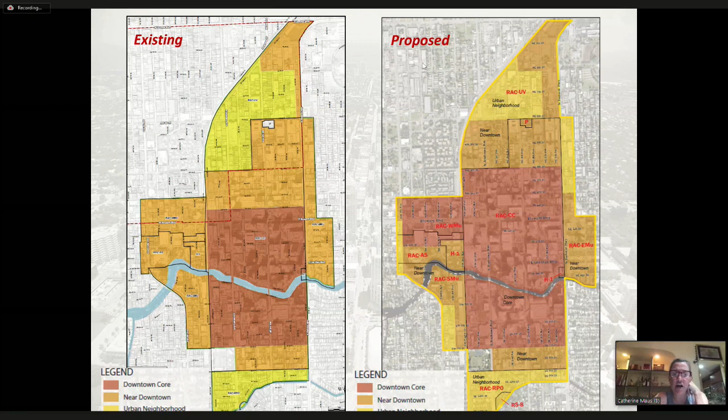Jay, your hand's up. Yes, just that when you read back the motion, Catherine, about the right-of-way calculation from the transition zone, I think you said from the character area - I think you meant to say the transition zone. I just wanted to correct that. Okay, thank you, Jay.

Any other comments or discussion? All right, so we're going to take a vote on item number 7. Chair, could I just get a clarification for the minutes - there's no conditions on this particular item, is that right? As I understand it, Mary's 4 conditions were appropriately applied to item number 6, not appropriately applied to item number 7. Would that be correct, Ella? Right, because minimum unit size, parking requirements, center of right of way, and tower separation would not apply to character areas.

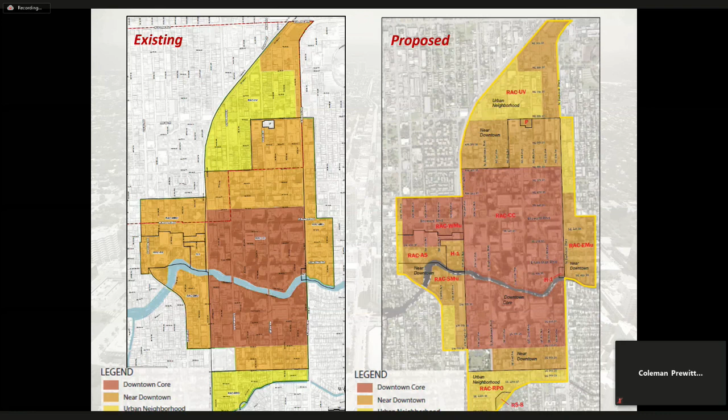Perfect. Okay, so calling the vote on item number 7, starting with Brad, Cohen - Yes. Coleman - Yes. Bill - Yes. Jackie - Yes. Jay - Yes. Michael - oh sorry, Michael's abstained. John - Yes. Mary - Yes. And I vote yes.

And could I just say, Bill Rotella, cheers to you for joining a new board in times of COVID and not having a face-to-face meeting. I appreciate that, Catherine. It would certainly be nice to see you all face to face. Thank you. This must feel like Greek to you.

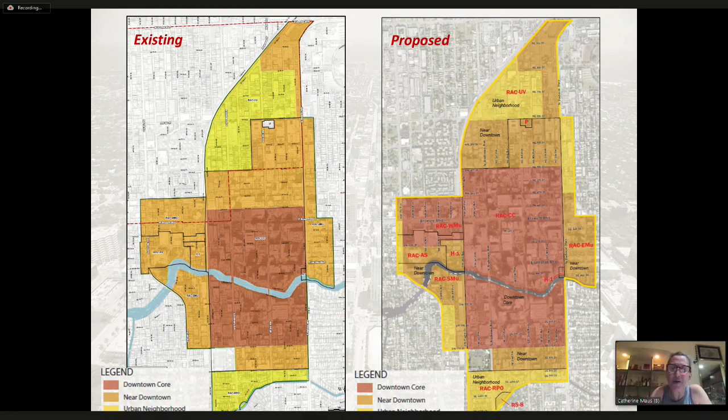Okay, moving on to number 8, PLN ULDR 2008-0001, establishing transition zones, pardon me. Do we have a motion or discussion?

Mary, would you like me to make a motion, Catherine? That would be great. I'm happy to make a motion. Thank you, Mary. Anytime for discussion, but no one's discussing, but I'm still making the motion in hopes that someone will say something. What's your motion on number 8? Motion to approve or adopt. Okay, do we have a second? Second, Catherine. Thank you, Coleman.

Any discussion on item number 8? Motion to approve, we have a motion and a second. Can we put the appropriate slides up here? Jim, do you mind? I'm sorry, say that again? If you have slides that pertain to this, could you put it up? Item number 8. I'm not quite sure why it went off the screen, actually. Let me try again. There we go. And which slide, I'm sorry? Number 8, the transition areas.

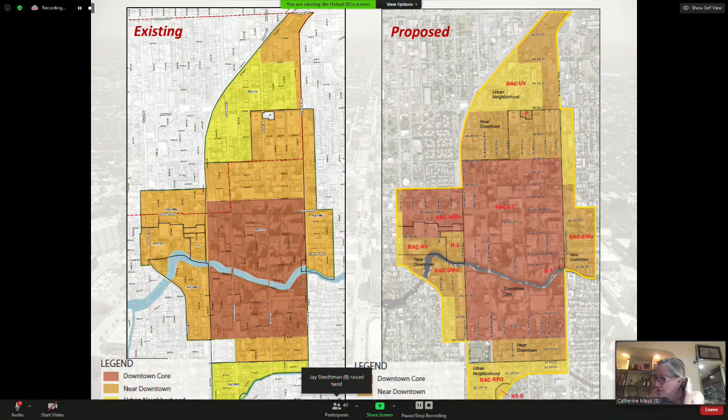Okay, so we have a motion and a second for the transition areas, item number 8, PLN ULDR 2008-0001. Do we have any discussion on this item? Jay? Yes, is the motioner including any amendment? As I understand it, no, the amendment's related to item number 6. But I'm happy to add that amendment on the transition one. Let me go back to her letter and read it. This is a lot of paper. I'm sorry, I hope the rest of you aren't.

Okay, here it says the right of way. Right of way is appropriate here, Mary. Yeah, I'm making the Allison Foster Civic Association, Tarpon River Civic Association amendment. To measure the character area, we'll be measuring from the center line of the right of way, so the right of way will not be counted as part of the transition zone. The zone depth will begin at the property line. To be more precise, the zoning district boundary should be changed from the middle of the street between zoning districts and start at the property line in the transition zone. That's my motion, that whole statement from the Tarpon River Civic Association, which I will email you.

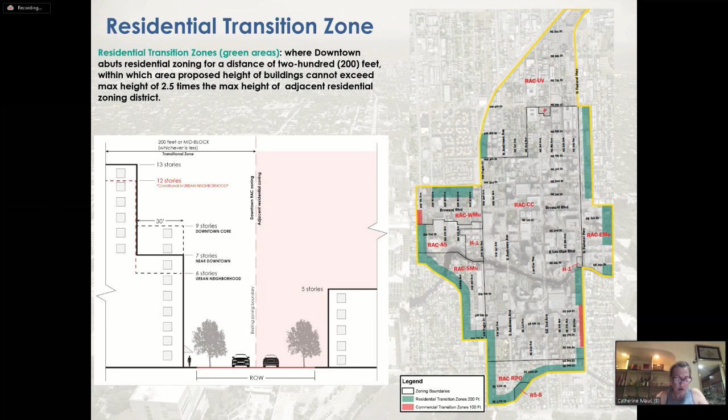I have a motion and a second on the item with one amendment, so I'm going to call the roll. Brad, yes. Coleman, yes. Bill, yes. Jackie, yes. Jay, yes. John, yes. Mary, yes. And I vote yes. So item 8 passes as amended.

Do we have anything for under communication to the city commission? I don't see any hands. Hey Catherine, sorry, just a quick thing for Jim. I know you mentioned we should expect an affordable housing program plan coming, is that correct?

So as a separate effort, but concurrent with this, we were directed by the city commission to analyze affordable housing and come up with a policy that looked at possibly, I would say, inclusionary zoning, but not use that term really in the true sense of inclusionary, but rather how can we get affordable units out of our flex policy or flex unit policy. The downtown RAC does have requirements tied to the land use for affordable unit set aside of what was recently approved in 2016 of 5,000 additional units for the RAC. So there is a separate affordability requirement that's tied to the RAC. However, there is an effort that city staff is putting together, a code language to deal with affordability, a citywide approach or citywide policy, and that still is being developed and will be presented to you because it'll be a code amendment and then on to the commission. But that's just kind of a big overview of what's coming.